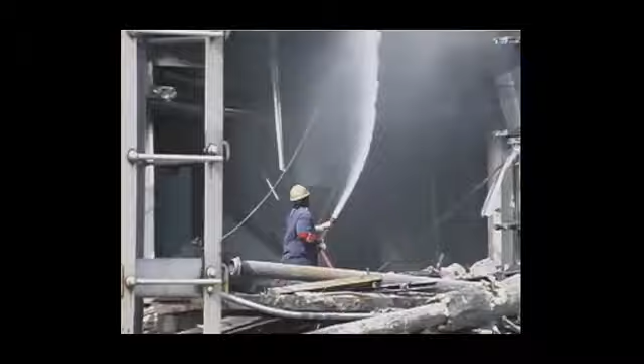8 workers died at the scene. 6 more died later at a regional burn center. Dozens of others were injured. The plant's massive sugar-packing buildings were a total loss.

The accident at Imperial Sugar was the deadliest industrial dust explosion in the United States in decades. It highlights the extremely serious nature of combustible dust hazards. There were significant accumulations of sugar dust and spilled granulated sugar on surfaces throughout this facility. Conditions were set for a catastrophic accident.

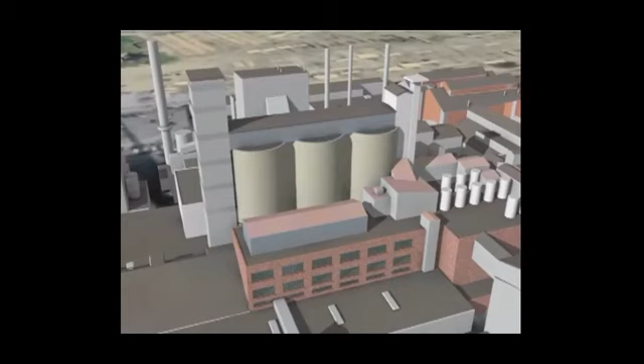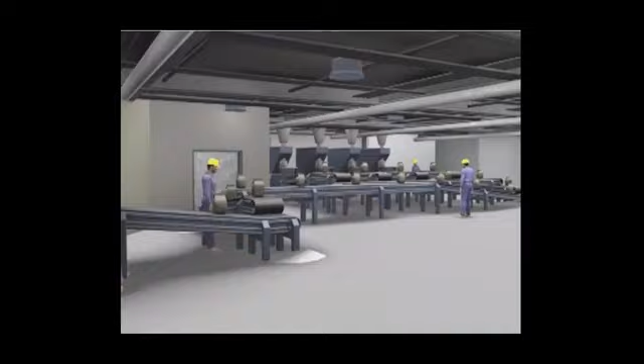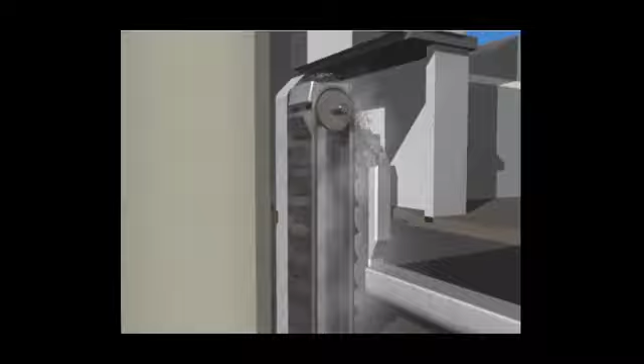Imperial Sugar's sprawling Port Wentworth complex began operations in 1917 and grew to become one of the largest sugar refining and packaging facilities in the U.S. Granulated sugar from the refinery was stored in 3 100-foot-tall silos and then conveyed into packing buildings where it was packaged for distribution. Granulated sugar was also converted into specialty products, such as brown sugar and powdered sugar. Sugar was transported by a complex system of bucket elevators, screw conveyors, and conveyor belts.

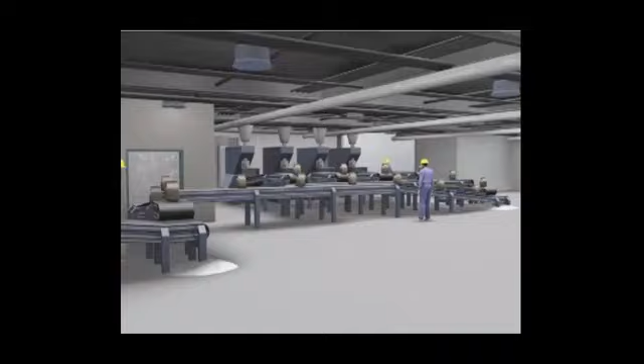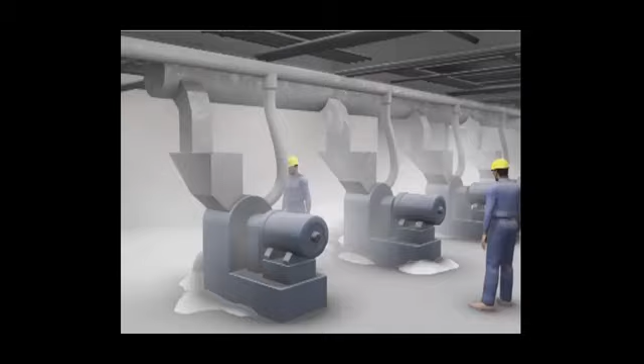During this process, sugar spilled onto floors throughout the work area. In places, the spilled sugar was many inches deep. This sugar also contained fine particles which became airborne. In addition, hammer mills were used to crush the granulated sugar into powdered sugar, creating even more dust.

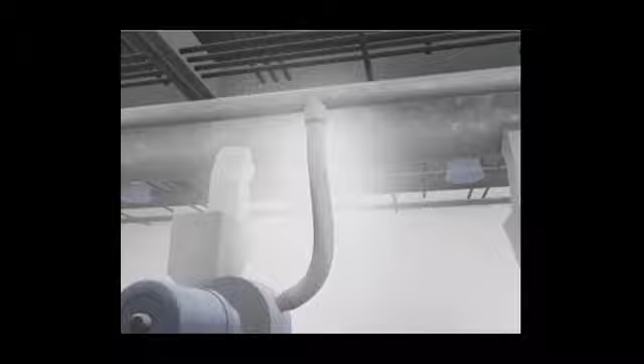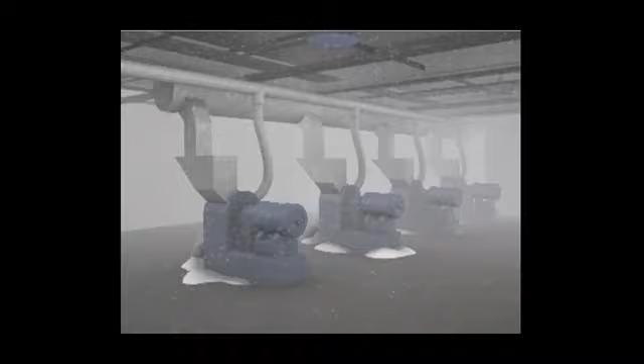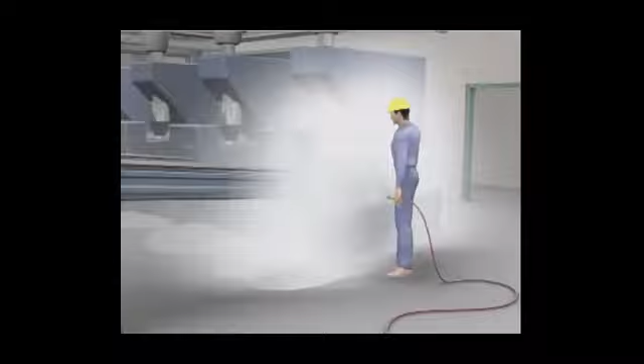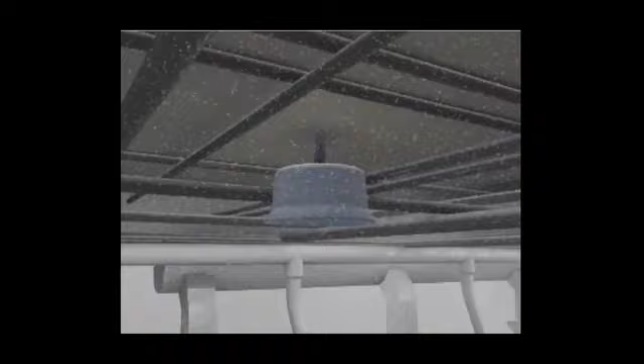The machines were connected to a dust collection system, but it was undersized and in disrepair, and it was not connected to the bucket elevators and conveyors. Significant amounts of sugar dust escaped into the work areas. Workers routinely used compressed air to clean packaging machines, further dispersing sugar dust throughout the buildings. Over time, large amounts of dust accumulated on elevated, hard-to-clean surfaces, such as ducts, beams, and light fixtures. These surfaces were not cleaned often enough to always keep the dust below hazardous levels.

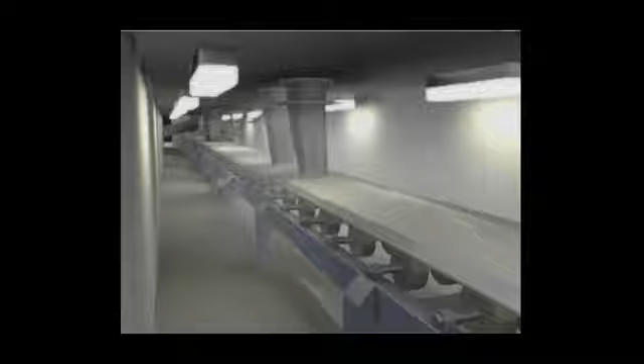In the tunnel beneath the sugar silos, granulated sugar flowed through chutes onto a long steel conveyor belt. From time to time, clumps of sugar would become stuck in one of the chutes, blocking the flow of sugar on the belt, spilling sugar onto the floor and releasing dust into the tunnel. But the tunnel was large and ventilated, so this airborne dust did not build up to explosive concentrations.

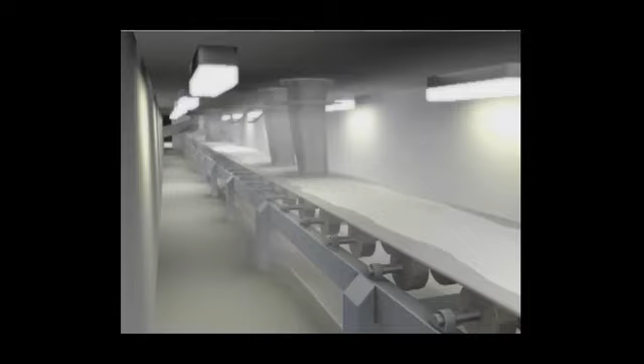However, in 2007, the company enclosed the conveyor belt with stainless steel panels to protect the sugar from possible contamination. The enclosure was not equipped with a dust collection system. As a consequence, sugar dust would now be trapped inside this enclosure.

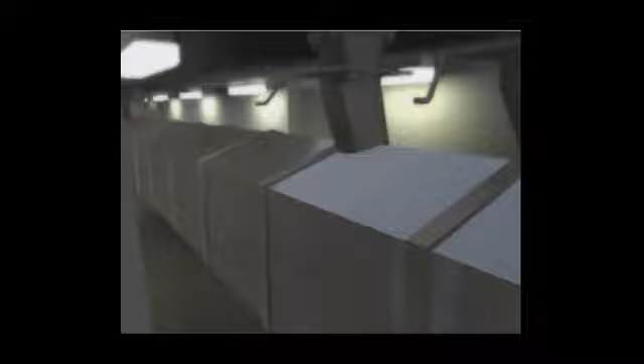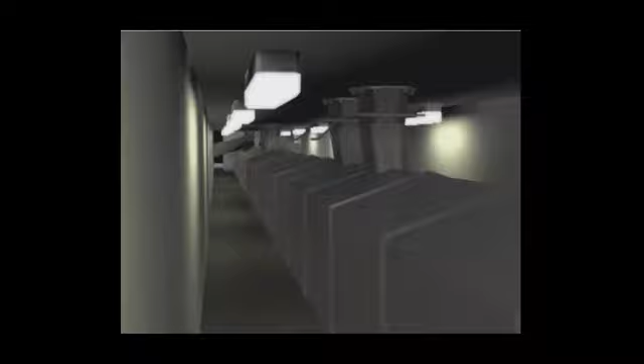On February 7, 2008, clumps of sugar were found blocking one of the discharge chutes. Sugar from the adjacent silo likely spilled off the moving belt. Dust likely accumulated to an explosive concentration inside the enclosure. At about 7:15 p.m., the sugar dust contacted a nearby ignition source, likely an overheated bearing, and exploded.

This primary explosion blew apart the enclosure and vented into the packing building. Accumulated sugar was lofted and ignited by the advancing fireballs. The dust clouds fueled a chain reaction of secondary explosions, which swept through the buildings. Concrete floors buckled, releasing tons of granulated and powdered sugar into the flames.

Emergency evacuation drills had not been conducted, and the explosions had cut the power to much of the interior lighting. In the maze of darkened and damaged stairwells and passageways, workers desperately tried to flee the growing inferno.

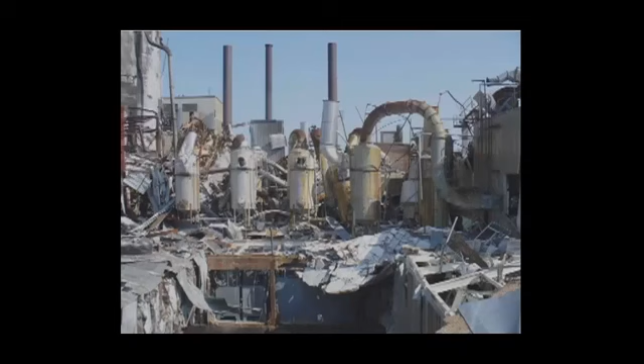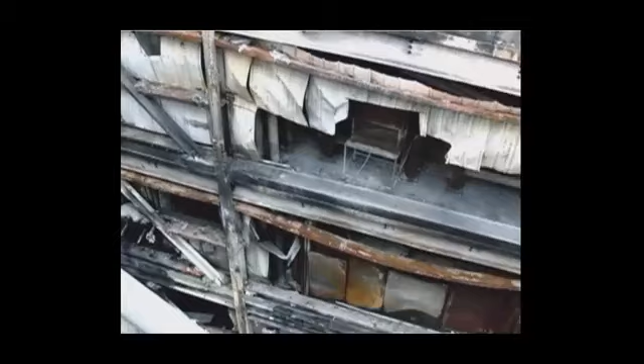The CSB found that correspondence dating back to the late 1960s showed that plant managers in Port Wentworth were aware of the explosive nature of sugar dust and the danger of dust accumulations. As far back as 1967, a memo described a sugar dust explosion that heavily damaged the powdered sugar mill room. Despite the long-standing awareness of the explosive nature of sugar dust, not enough was done to manage the hazard.

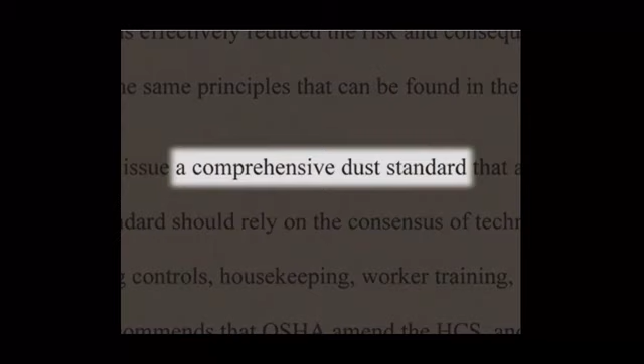In 2006, the CSB issued a study of combustible dust, which called on OSHA to establish a comprehensive combustible dust standard based on the current standards of the National Fire Protection Association, or NFPA.

In October 2007, OSHA began implementing a new national emphasis program to increase the enforcement of existing regulations related to combustible dust. Imperial Sugar learned of the OSHA Combustible Dust National Emphasis Program 4 months before the devastating explosion at Port Wentworth. But management did not act effectively to control the serious dust problem in the packing buildings.

Less than 2 months before the disaster, an internal inspection showed that many tons of sugar were still regularly spilling onto the floors. This provided much of the fuel for the massive secondary explosions and fires.

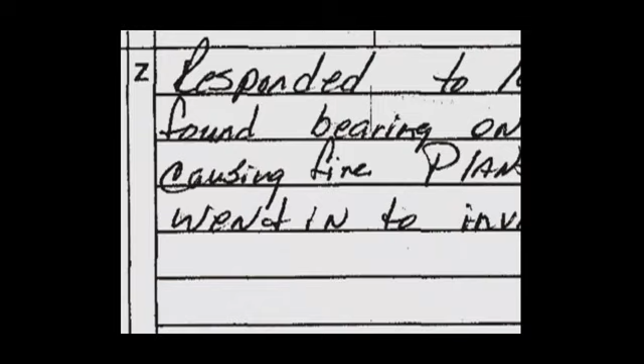The CSB found that over the years, the Port Wentworth facility periodically experienced small fires fueled by spilled sugar and accumulated dust on equipment. But none resulted in a sugar dust explosion that propagated through the plant. Investigators said that decades of operating without a catastrophic explosion may have lulled managers into complacency.

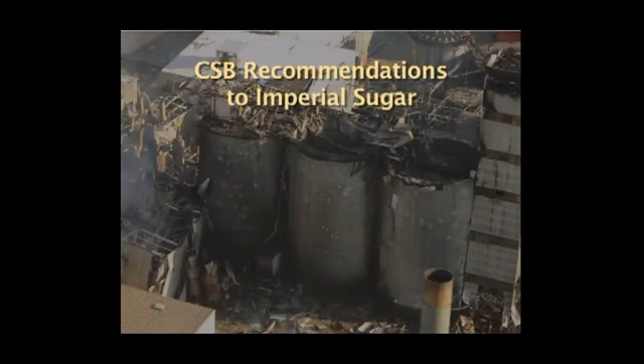In its report, the CSB issued the following recommendations to the Imperial Sugar Company: apply NFPA standards to the design and operation of the rebuilt Port Wentworth facility; develop and implement comprehensive combustible dust control, housekeeping, and training programs; and improve emergency evacuation policies and procedures.

Companies can go a long way to control combustible dust within their own facilities by following the existing recommendations of the National Fire Protection Association. But it is also time for a comprehensive federal standard on combustible dust.

In April 2009, OSHA announced plans to begin rulemaking on a combustible dust standard for general industry. In its final report on the Imperial Sugar accident, the CSB recommended that OSHA move forward expeditiously with the new standard. Without regulation, enforcement, and education, workers will continue to be at risk from catastrophic dust explosions.